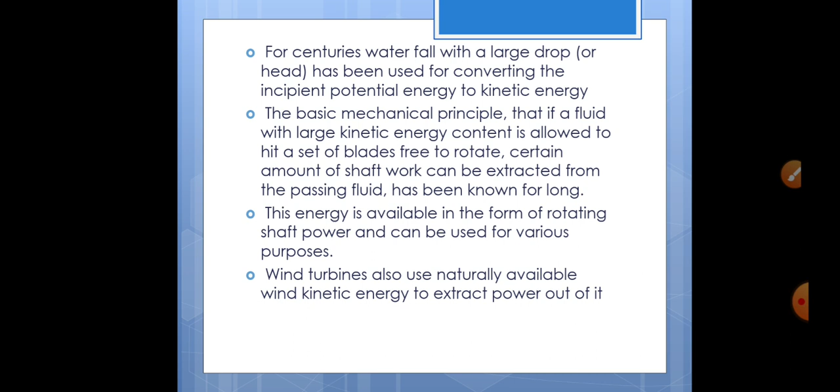This energy is available in the form of rotating shaft power and can be used for various purposes. Wind turbines also use naturally available wind kinetic energy to extract power out of it. It was also understood that for a gas turbine engine to go on an aircraft, it must be compact in size and must weigh as little as possible. This requirement translates to the need for a turbine which produces high energy extraction per unit mass or energy density of gas it is working on.

The graduation of gas turbine based engines to jet engines in all its variants comes from the basic fact that the working fluid, that is air, enters and exits almost parallel to the axis of the engine. Thus gas, if it contains sufficient residual energy after the turbine, can be exhausted through a jet nozzle to create a direct engine jet thrust.

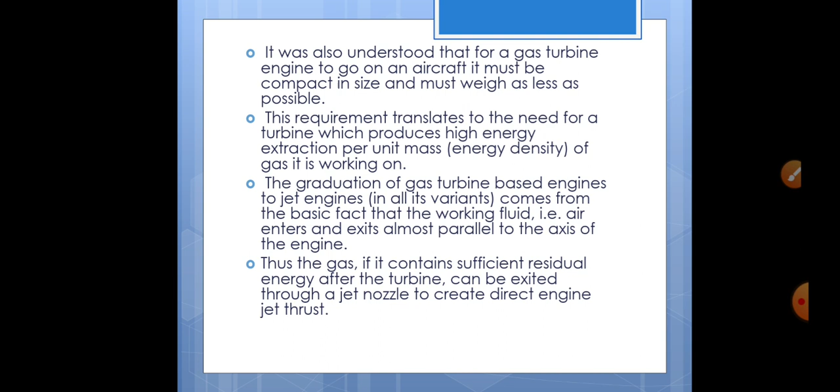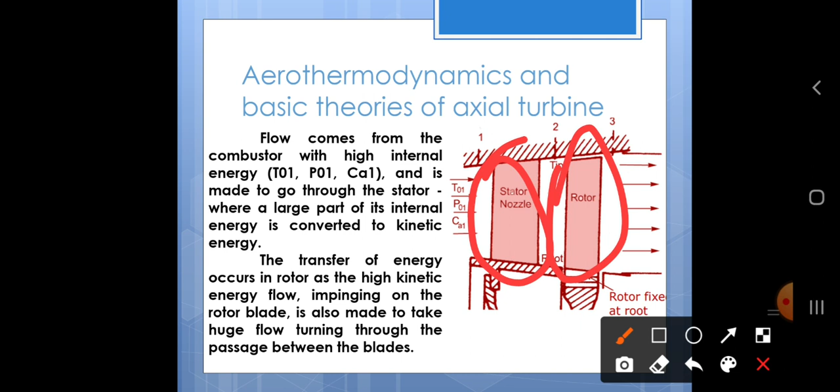Aerothermodynamics and basic theories of axial turbine. So here you can see stator. Here we can see stator, rotor. A combination of stator and rotor will be considered as a stage. Flow comes from the combustor with high internal energy T01, P01, Ca1 and is made to go through the stator where a large part of its internal energy is converted into kinetic energy.

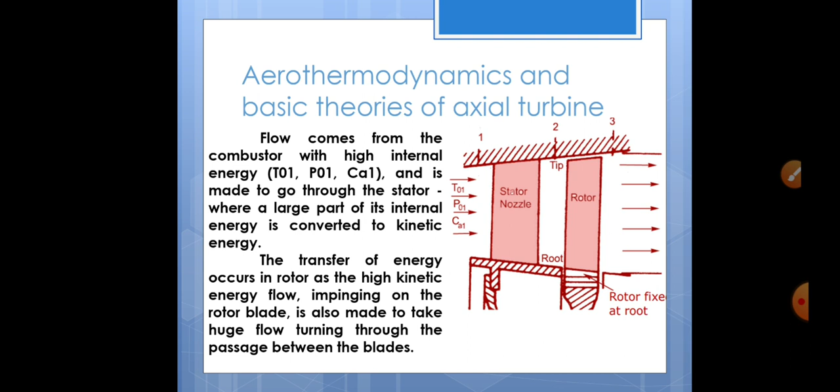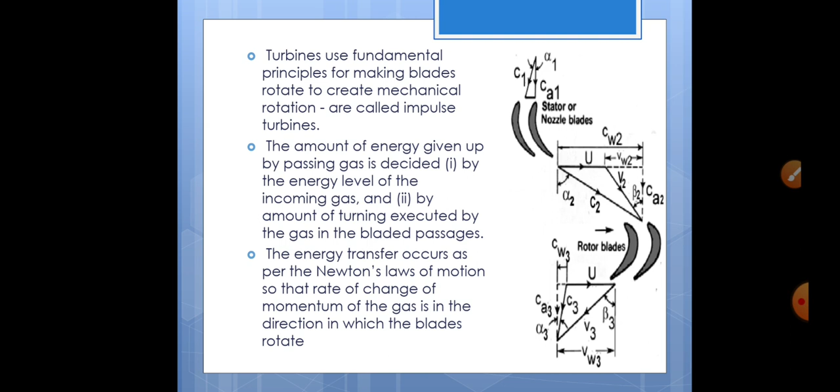The transfer of energy occurs in the rotor as high kinetic energy flow impinging on the rotor blade is also made to take huge flow turning through the passage between the blades. Turbines that use this fundamental principle for making blades rotate to create mechanical rotation are called impulse turbines. The amount of energy given up by the passing gas is decided by the energy level of the incoming gas and by the amount of turning executed by the gas in the bladed passage. The energy transfer occurs as per Newton's law of motion so that rate of change of momentum of the gas is in the direction in which the blade rotates.

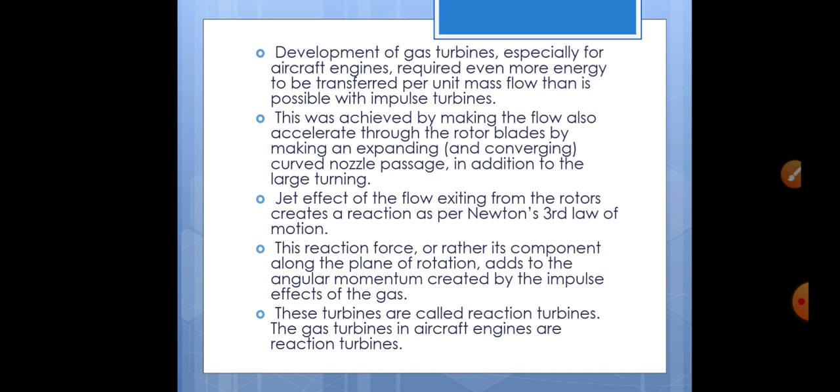Development of gas turbines, especially for aircraft engines, required even more energy to be transferred per unit mass flow than is possible with impulse turbine. This was achieved by making the flow also accelerate through the rotor blades by making an expanding and converging curved nozzle passage in addition to the large turning. Jet effect of the flow exiting from the rotors creates a reaction as per Newton's third law of motion. This reaction force, or rather its component along the plane of rotation, adds to the angular momentum created by the impulse effect of the gas. These turbines are called reaction turbines. The gas turbines in aircraft engines are reaction turbines.

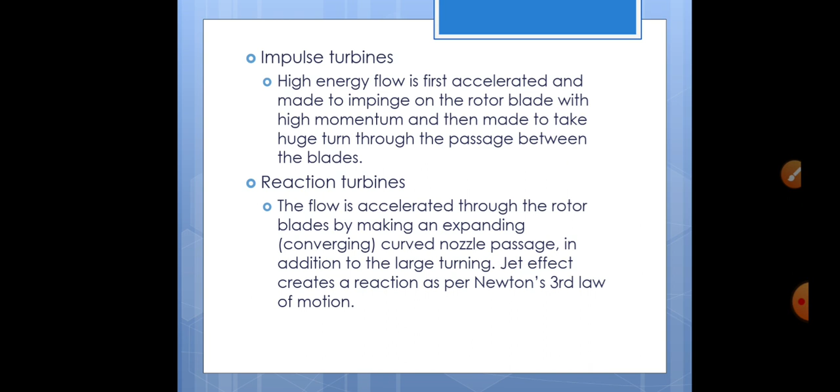Impulse turbine: high energy flow is first accelerated and made to impinge on the rotor blade with high momentum and then made to take a huge turn through the passage between the blades. Reaction turbine: the flow is accelerated through the rotor blades by making an expanding, converging, curved nozzle passage in addition to the large turning. Jet effect creates a reaction as per Newton's third law of motion. In the impulse turbine described earlier, V2 is equal to V3. In reaction turbine, V3 is greater than V2.

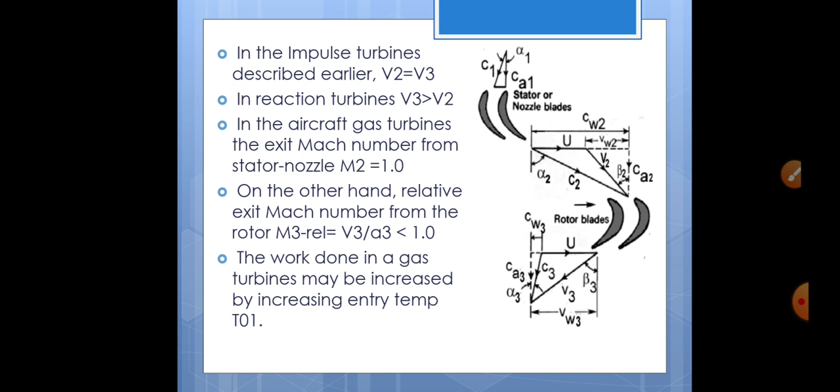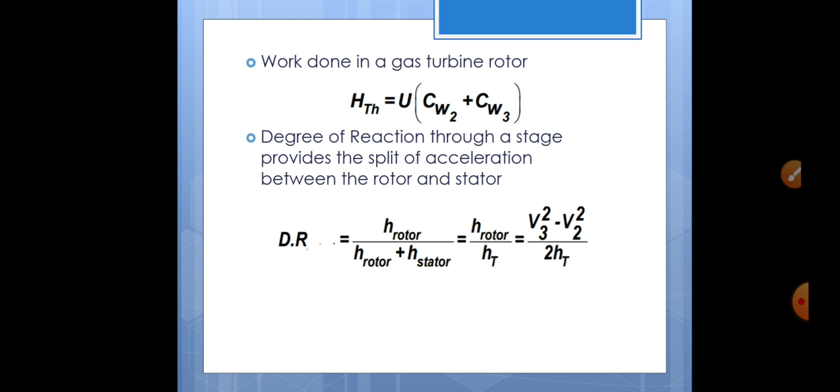In the aircraft gas turbines, the exit Mach number from the stator nozzle M2 is equal to 1.0. On the other hand, the relative exit Mach number from the rotor M3rel, that is V3 by A3, is less than 1. The work done in gas turbine may be increased by increasing entry temperature T01. Work done in gas turbine can be given as HT is equal to U of CW2 plus CW3. Degree of reaction through a stage provides the split of acceleration between the rotor and stator. So degree of reaction can be given as H rotor divided by H rotor plus H stator. That implies H rotor by HT is equal to V3 square minus V2 square by 2HT.

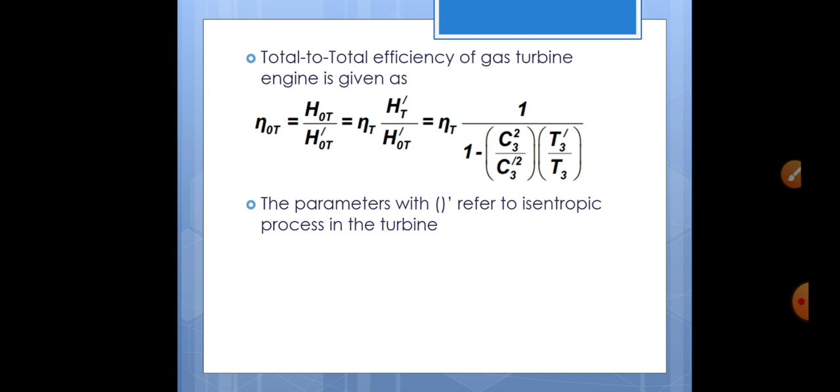Total to total efficiency of gas turbine engines can be given as eta of 0T, that is total efficiency of the total gas turbine engine, can be given as H0T divided by H dash of 0T, which is equal to eta of T, H dash T by H dash of 0T. That implies eta T into 1 by 1 minus C3 square by C3 dash square of T3 dash by T3. The parameters with dash refer to isentropic process in the turbine.